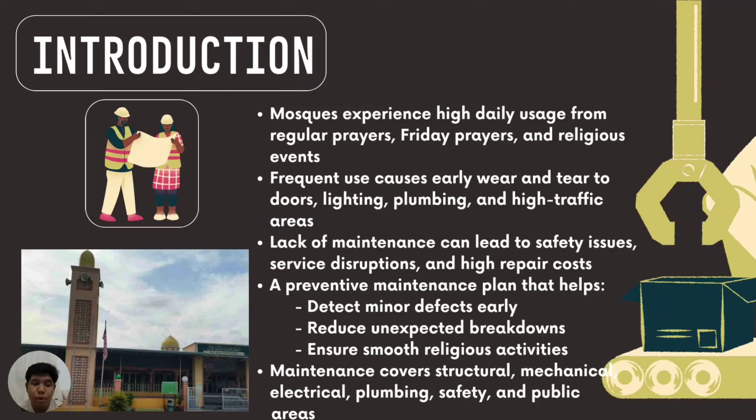For our assignment, there are three main objectives. Firstly, to ensure the safety, hygiene, and comfort of the worshippers at the mosque. Secondly, to preserve the building integrity of the mosque and extend the mosque's service life and its components. Finally, the objective is to optimize the operation of the mosque and its efficiency and minimize emergency costs.

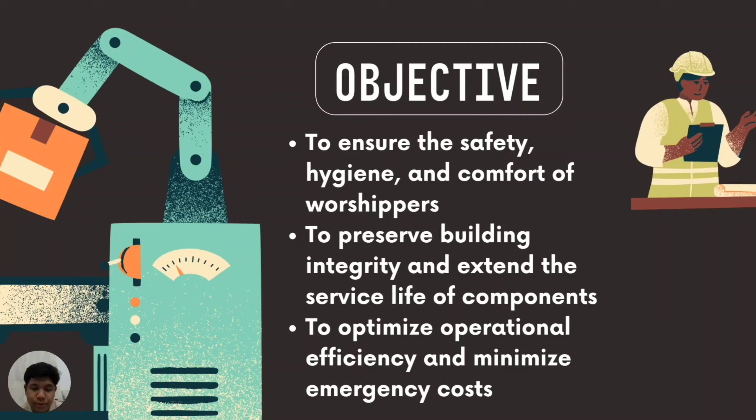Hello, my name is Muhammad Naswar bin Azam. Today I will present about the preventive maintenance strategy. The first is the building prayer hall of the mosque. For this topic, the group has chosen the mosque.

The first strategy is building envelope and exterior. As you can see, this picture is a gutter. The first component is roofing, external wall, gutter, and downspout.

Second is the maintenance strategy: weatherproof inspection. This is a condition-based and time-based preventive maintenance, with extra inspection before storm or rainy season.

Three is the procedure. Roofing: check tile, metal sheet, joint, flashing, edge. Gutter: clean debris for smooth drainage. Wall: inspect crack, damp patches, peeling paint, and mold. Surrounding: keep drainage points clean. Visual diagram or illustration of roofing, wall, and gutter.

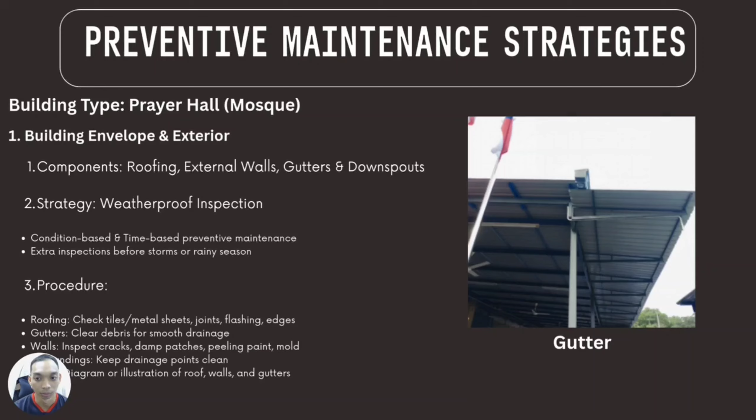As you can see, this is the group's photo of a gutter at the mosque. And the fourth is inspection frequency: inspection is done quarterly and as pre-monsoon inspection.

Number five is to prevent leaks, water damage, and structure deterioration; ensure safety and avoid slip hazards. And number three, extend the lifespan of building materials and preserve aesthetics.

Number four, support uninterrupted worship activity. And number five, visual icon graphic showing safety, protection, and maintenance.

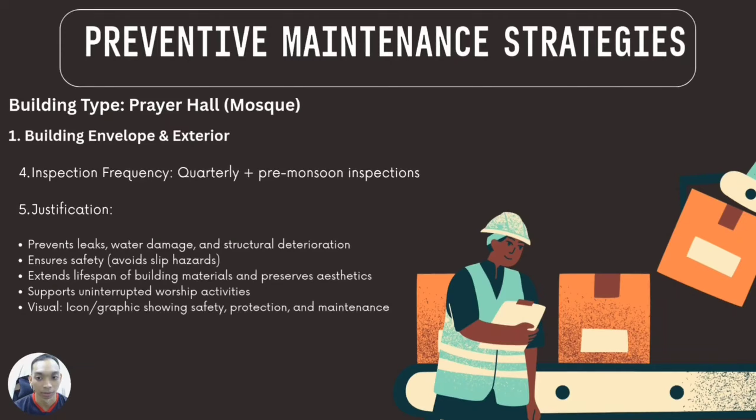The second is the HVAC system and maintenance strategy. The first system components are the HVAC unit, air handling unit, ventilation fan, and ductwork. Second is air vent, thermostat, fan motor, and V-belt. As you can see, the picture shows the aircon at the mosque.

Second maintenance strategy is time-based preventive maintenance. Number two, condition-based check during high occupancy and peak uses.

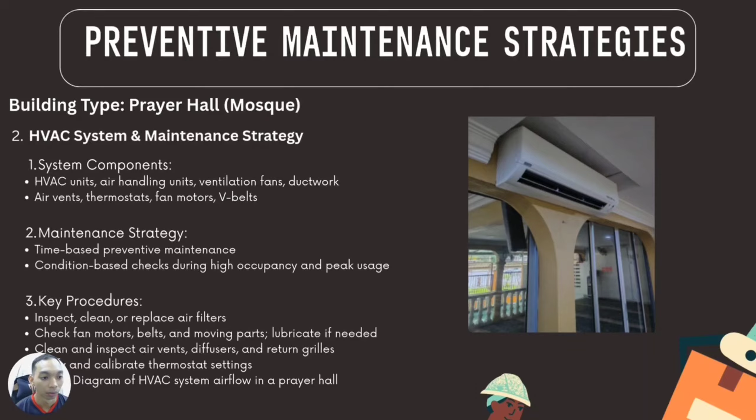Number three is the procedure: inspect, clean or replace air filter; check fan motor, belt and moving parts, lubricate if needed; clean and inspect air vent, diffuser and return grill; verify and calibrate thermostat setting. And number four, visual diagram of HVAC system airflow in the prayer hall.

The frequency is twice a year, with additional checks during high attendance or extreme weather.

Number five is justification: ensure comfort, thermal control, and indoor air quality. Number two, prevent heat stress, poor ventilation, and reduced focus. Number three, improve system efficiency and reduce energy consumption. Number four, minimize risk of breakdown during peak prayer time. Number five, extend equipment lifespan and lower long-term costs. Number six, maintain hygiene and a safe worship environment. And lastly, visual icons showing comfort, airflow, and maintenance tools.

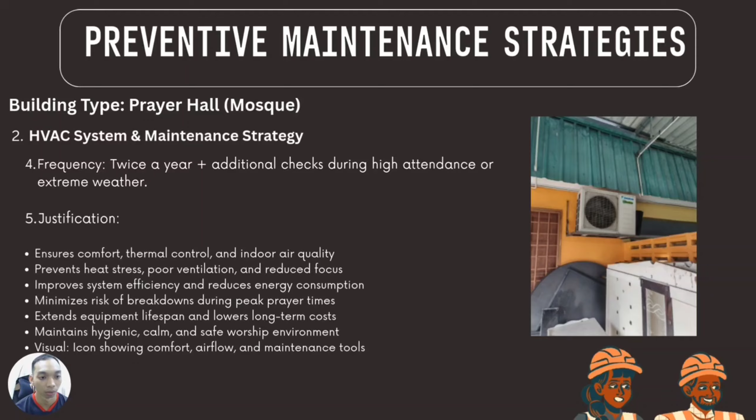Good morning everyone, my name is Amira Hamza, my matric number is B123101113. For my part of the presentation, I will explain the plumbing and water system in the wudu area and the electrical system in the mosque, with a focus on preventive maintenance.

First, the plumbing and water system in the wudu area is one of the most frequently used systems in a mosque, because worshippers perform wudu before every prayer. Due to continuous usage, components such as taps, pipes, and joints experience wear over time. Preventive maintenance helps detect leaks early, reduce water wastage, and prevent slippery floors that could cause accidents.

Regular cleaning of floor drains is also important to prevent blockages caused by soap, residue, and debris. Proper drainage keeps the area clean, dry, and hygienic. In addition, water pressure is monitored to ensure comfort for users while avoiding damage to the plumbing system.

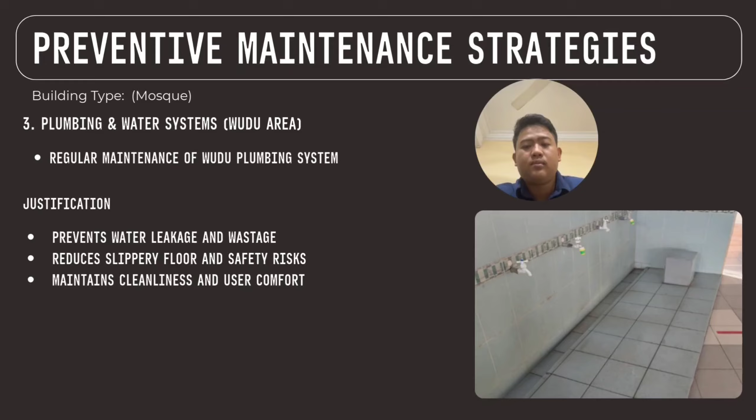Next, I will explain the electrical system, which plays a critical role in ensuring safety, visibility, and comfort inside the mosque. This system supports daily religious activities and must operate reliably at all times, especially during early morning and night prayers. Preventive maintenance of the electrical system begins with checking all lighting fixtures to ensure they provide adequate illumination, and faulty, dim, or flickering lights are replaced immediately to prevent poor visibility, which could lead to trips or falls.

Well-maintained lighting also creates a calm and comfortable environment for worshippers during prayer. In addition, electrical switches and power sockets are inspected to ensure they are properly installed and functioning correctly. Loose or damaged switches and sockets can pose a serious risk of electrical shocks, especially in areas close to water such as the wudu area.

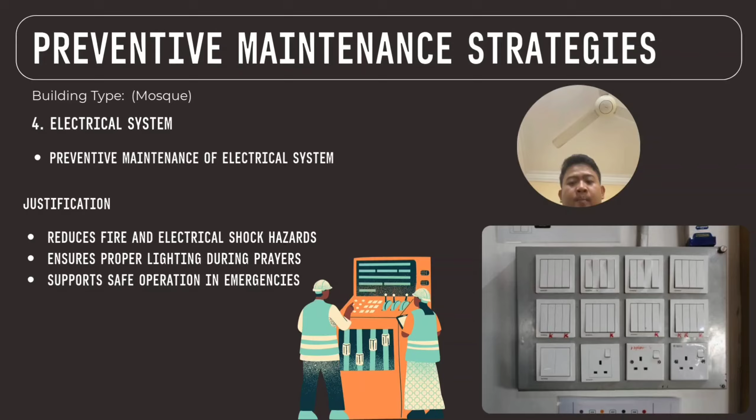Good morning everyone, my name is Muhammad Zafizi bin Mata. I want to present my point, which is fire and life safety systems. First, fire and life safety systems are very important in mosques because many people gather, especially during Friday prayer and special events. This system includes fire extinguishers, smoke detectors, alarms and fire alarms, emergency lights, exit signs, and emergency exits. All equipment must be in good working condition at all times.

Fire extinguishers must be easy to reach, not expired, and have correct pressure. Smoke detectors and alarms must be tested regularly to ensure early fire detection. Emergency lights and exit signs must work during power failure to guide people safely. Emergency exits and corridors must always be clear.

And not blocked. Inspections are carried out every six months, with extra checks before major events. Good maintenance helps prevent injury, save lives, and ensure safety.

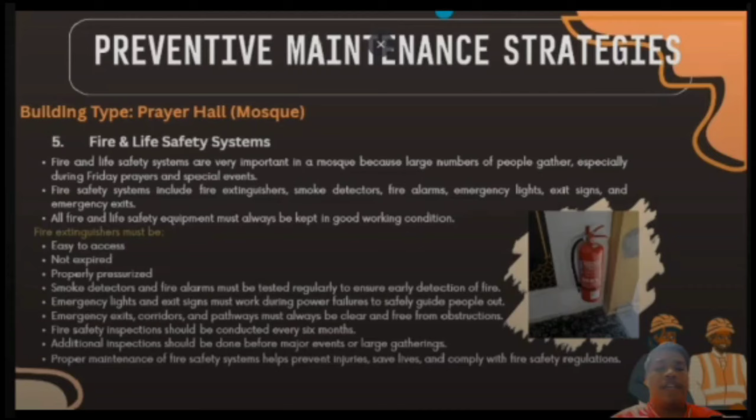The next point is public and common areas. Public and common areas mostly include the walkway, stairs, handrails, shoe storage areas, floors, signs, and circulation space. These areas have heavy foot traffic and must be kept safe and accessible.

Floors should be flat, clear, and not slippery to prevent falls. Damaged tile or cracks must be repaired quickly, and anti-slip mats should be used in wet areas.

Shoe racks must be well organized and not block the walkway. The corridor must be clear, well lit, and clean at all times.

Inspections are done monthly to reduce accidents and ensure a safe and comfortable environment for all worshippers.

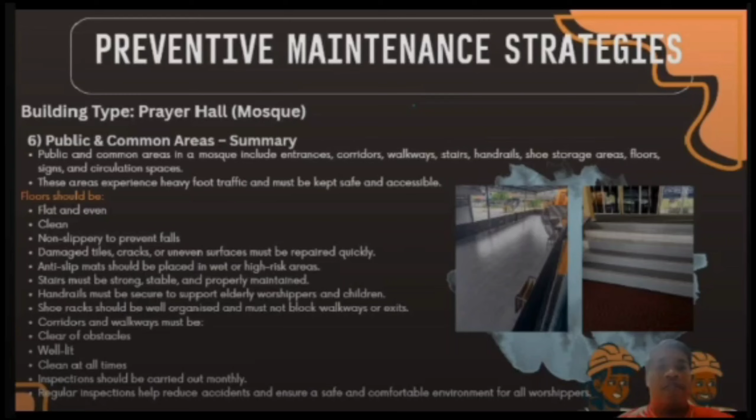Okay, next I'll present about the specific high use or critical facility component, which is the prayer hall carpet.

The prayer hall carpet is one of the most frequently used components because worshippers pray directly on it several times a day. Due to high foot traffic, dust, and moisture exposure, the carpet has a strong impact on hygiene,

comfort, and safety. If the carpet is not properly maintained, dust and dirt can accumulate, affecting indoor air quality and causing discomfort, while moisture can also lead to unpleasant odors and bacterial growth. In addition, worn or loose carpet edges may create a trip hazard, especially for elderly worshippers and children.

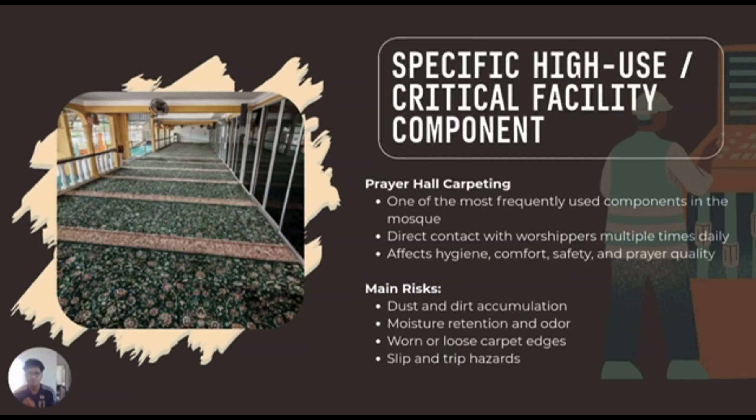For maintenance activities to prevent this issue, a hygienic carpet maintenance program is implemented. This includes weekly vacuuming to remove dust, immediate spot cleaning for stains or wet areas, and deep cleaning twice a year using shampoo or steam methods.

Regular inspections are also carried out to identify damage and uneven carpet areas. Overall, proper maintenance of the prayer hall carpet ensures a clean, safe, and comfortable prayer environment, and it also extends the carpet's service life and supports smooth and uninterrupted worship activities.

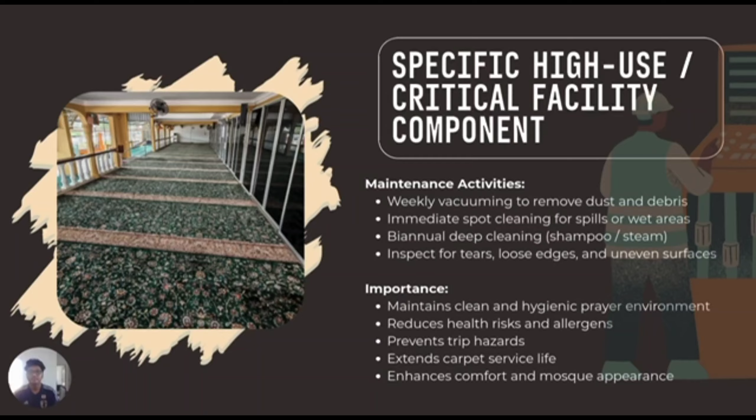Next is seasonal and cyclical preparation. During the monsoon season, heavy rainfall and high humidity can cause the roof to leak, flooding, and moisture damage if the building is not properly maintained. Therefore, seasonal preventive maintenance is important to protect the mosque and ensure safe and uninterrupted worship activities.

The system involved in this maintenance focuses on key components such as the roof and roof joints, gutters and downspouts, stormwater drainage, doors, windows, and ventilation.

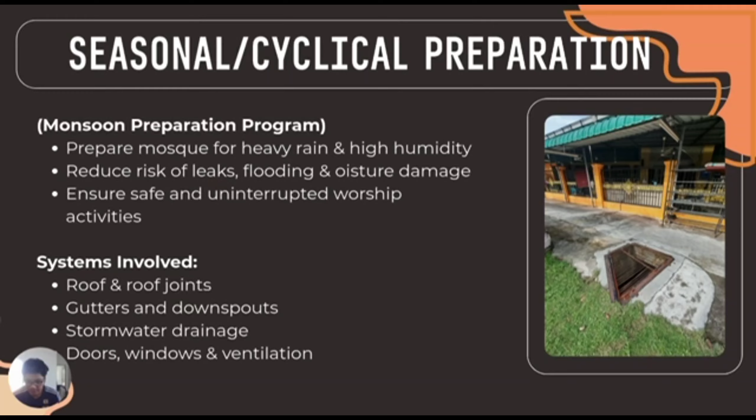Before the monsoon season, gutters and the drainage system are cleaned to prevent blockage and water overflow, and the roof is also inspected for loose tiles or damaged sheets to reduce the risk of leaks.

The doors and windows are also checked for gaps or damaged seals that may allow water to enter the building. Where available, drainage or sump pumps are tested to ensure they function properly during heavy rainfall.

These activities are carried out annually before the monsoon season, with additional inspection after heavy storms if needed. Overall, the monsoon preparation program helps keep the mosque dry, safe, and functional, while reducing emergency repairs and protecting the comfort of worshippers.

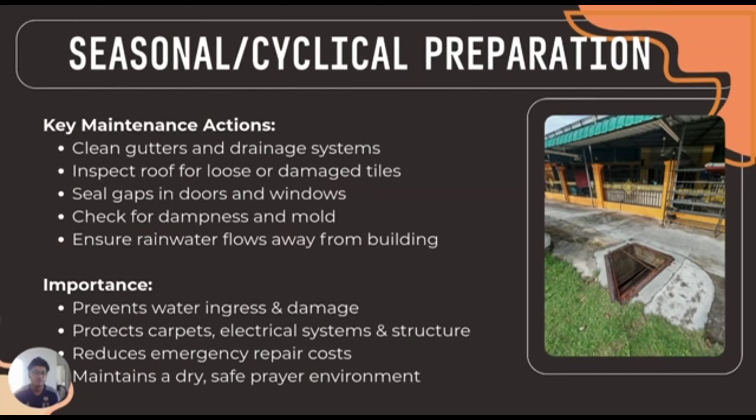Next, I will present the conclusion. What we can conclude in this presentation is that preventive maintenance activity is very important for the mosque's prayer hall because the mosque experiences continuous high occupancy frequently.

Using a structured plan, it can improve the safety, functionality, and comfort of worshippers at the mosque when they are using the mosque for any religious activity.

We can prove that with regular inspection, it will reduce equipment failure at the mosque and improve safety, while also minimizing costly corrective repairs for the mosque equipment.

So we must focus on critical areas. In this assignment, we mainly focus on critical areas such as the wudu facility, prayer hall, and fire safety system.

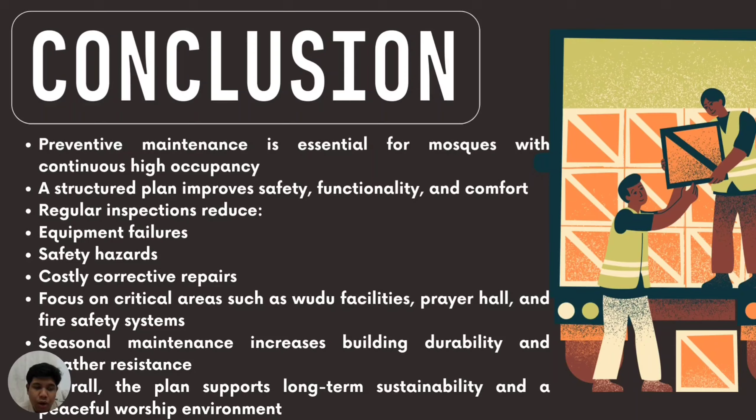Seasonal maintenance must also be focused on because it increases the building's durability and weather resistance. Overall, this plan supports the long-term sustainability of the mosque's prayer hall and a peaceful worship environment for people.